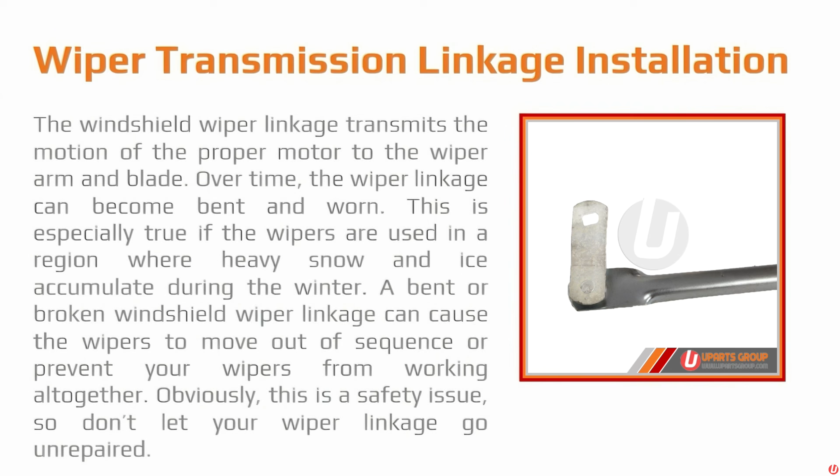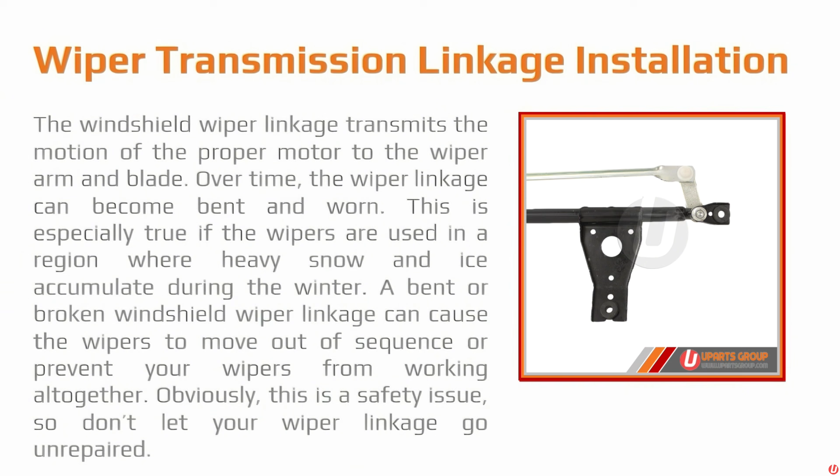The windshield wiper linkage transmits the motion of the wiper motor to the wiper arm and blade. Over time, the wiper linkage can become bent and worn. This is especially true if the wipers are used in a region where heavy snow and ice accumulate during the winter. A bent or broken windshield wiper linkage can cause the wipers to move out of sequence or prevent your wipers from working altogether. Obviously, this is a safety issue, so don't let your wiper linkage go unrepaired.

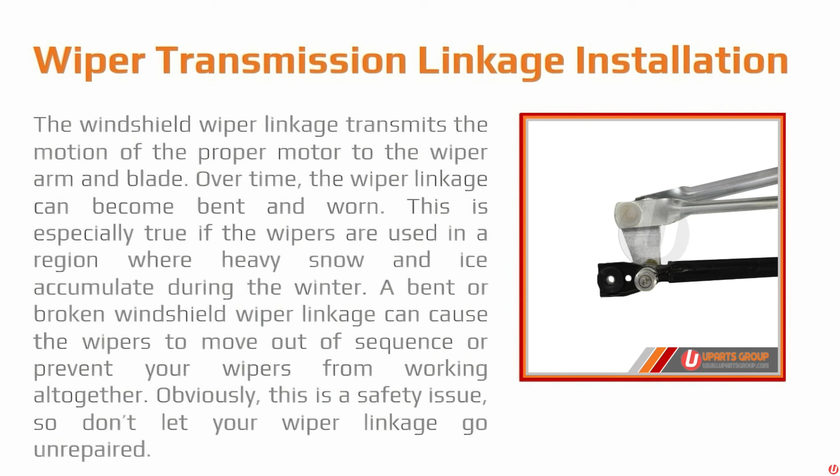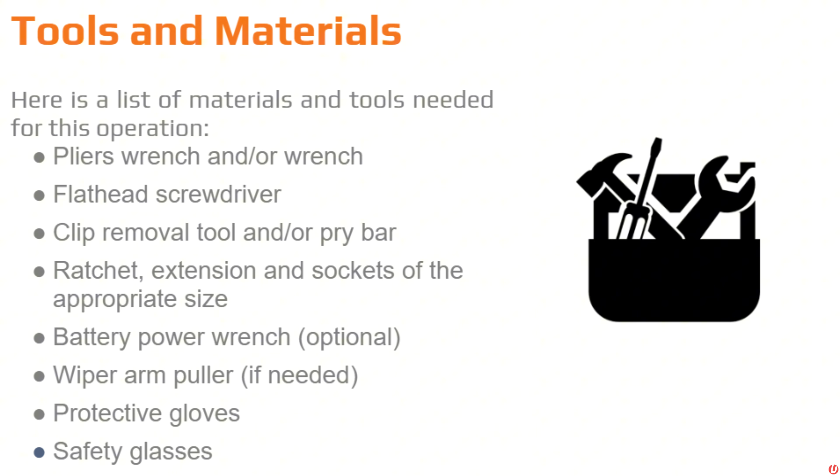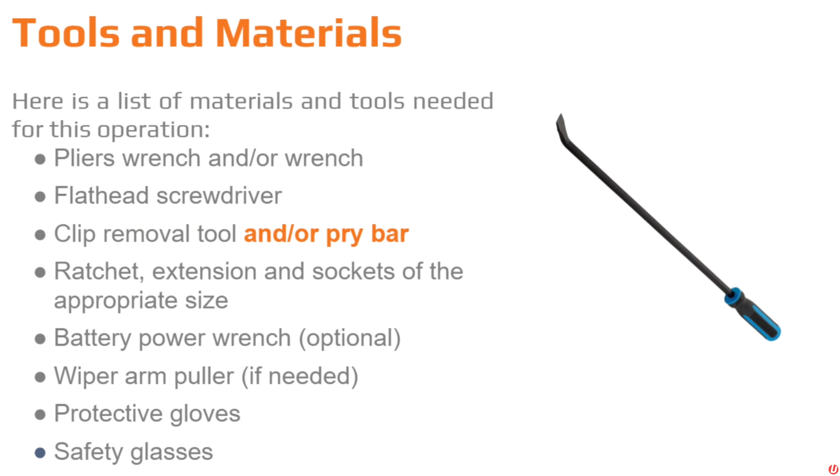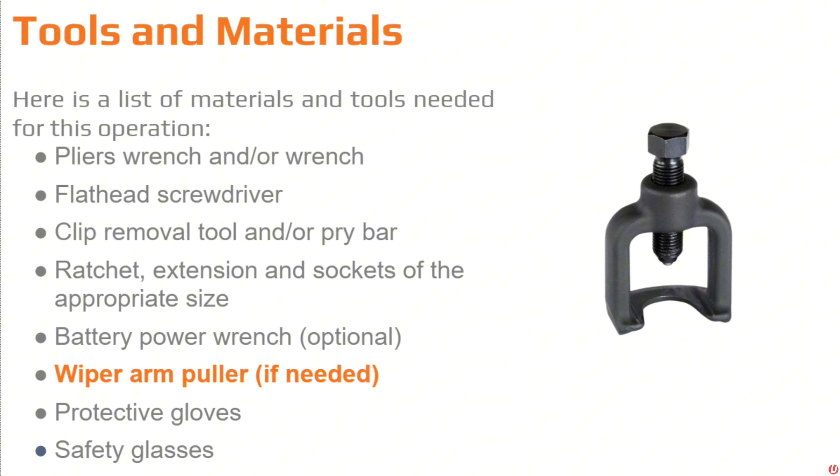This job has been considered an easy difficulty level of installation by our technicians. The suggested time for this job is about 30 minutes to 45 minutes as per our technicians. Here's a list of materials and tools needed for this operation. Pliers wrench and/or wrench. Flathead screwdriver. Clip removal tool, trim tool and/or pry bar, ratchet, extension and sockets of the appropriate size, battery power wrench, wiper arm puller if needed, protective gloves, safety glasses.

Today we are going to replace the windshield wiper linkage on a Mazda Tribute 2001 using U-Parts Group replacement part number WLTR01. Here is some additional information on the U-Parts Group part number. The U-Parts Group part number is WLTR01. This application will fit all Mazda Tribute from 2001 to 2006 and all Ford Escape from 2001 to 2007, as well as all Mercury Mariner from 2005 to 2007.

The Mazda OEM part number is ECY1-67-360, or EC01-67-360 A, B, C, or ZZC0-76-360, or ZZC0-76-601. The Hollander part number is 621-00511. The Canadian Tire part number is 021-2034. And the Dorman Products part number is 602-301.

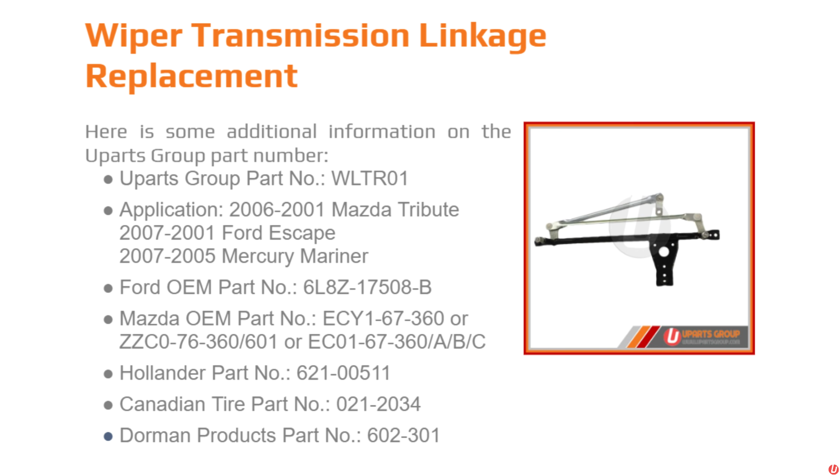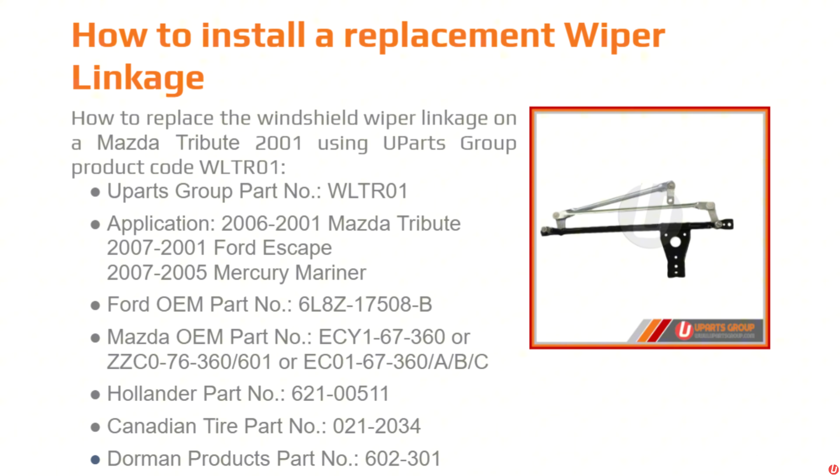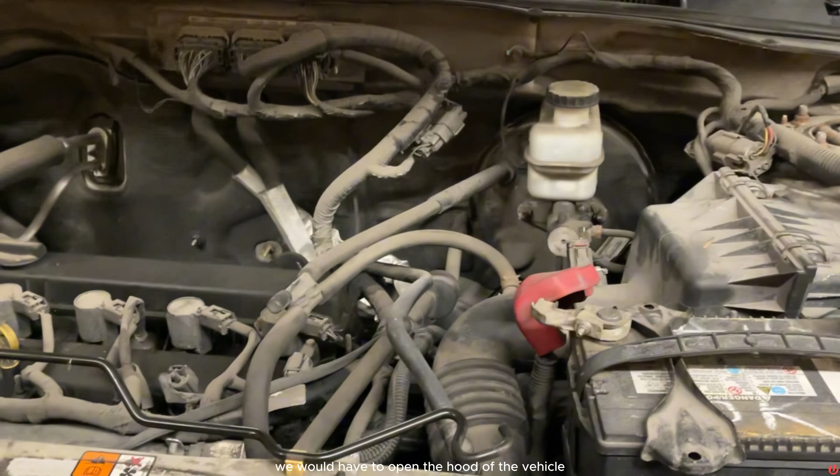How to change the wiper linkage on a Mazda Tribute 2001 using U-Parts Group replacement part number WLTR01. To replace the linkage, we would have to open the hood of the vehicle. Before we remove the wiper arms, it's recommended to mark the position of the two wiper arms, so we can reinstall them to the same position after replacing the wiper transmission linkage. We can use a yellow or white marker to mark the position of the two wiper blades.

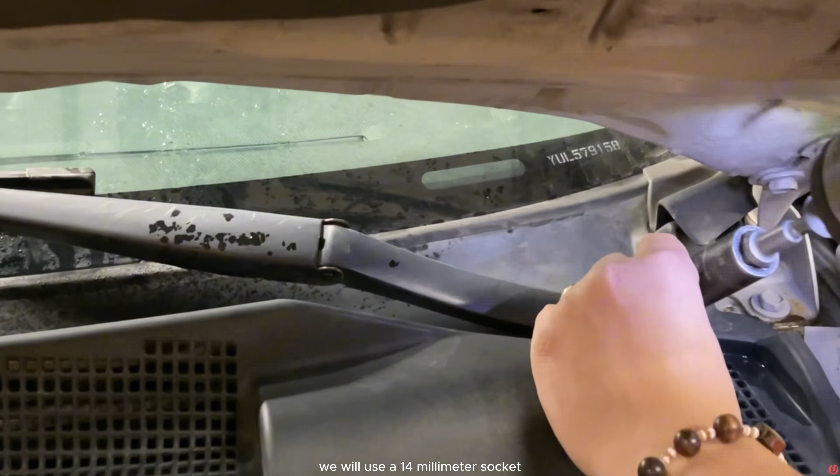To remove the wiper arm nut, we will use a 14mm socket. To remove the wiper arm, we can use a wiggling motion up and down. This motion will release the wiper arm from the shaft of the wiper linkage. If you are having trouble removing the wiper arms, you can use a wiper arm puller. After removing the two wiper arms, we will set them aside.

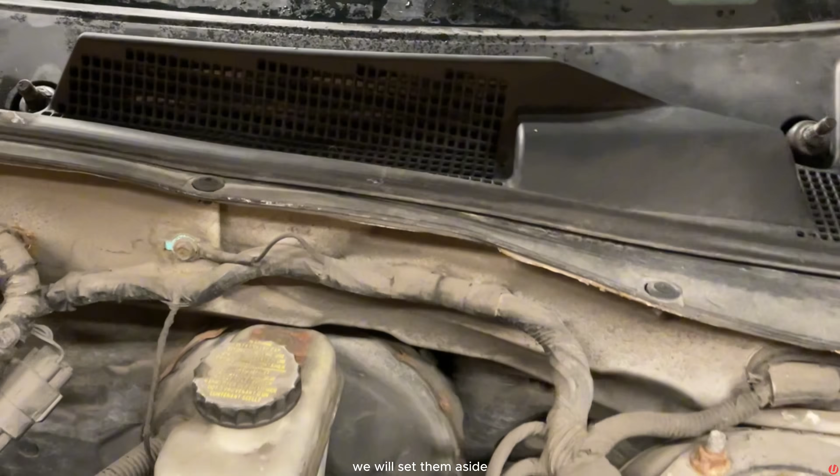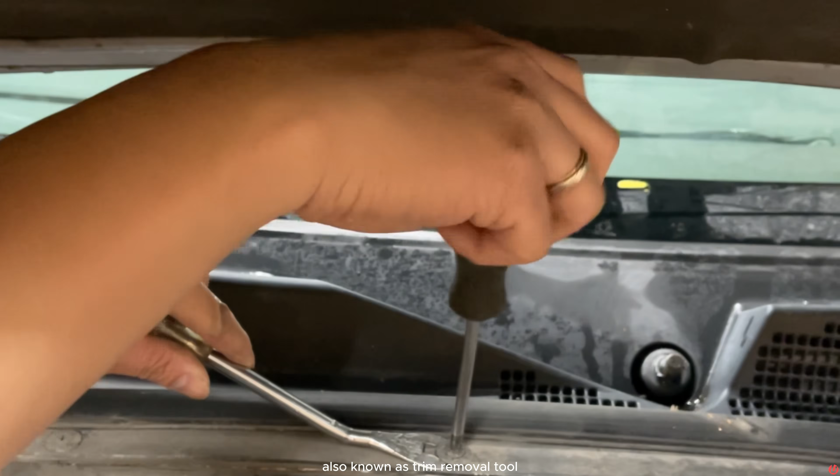Before removing the cowl panel, we will have to remove the 7 push pins that run along the cowl panel using a clip removal tool, also known as a trim removal tool. Also, we need to loosen the rubber fender trims on the driver's side and passenger side. These rubber trims sit on top of the cowl panel and run along the edge of the fender.

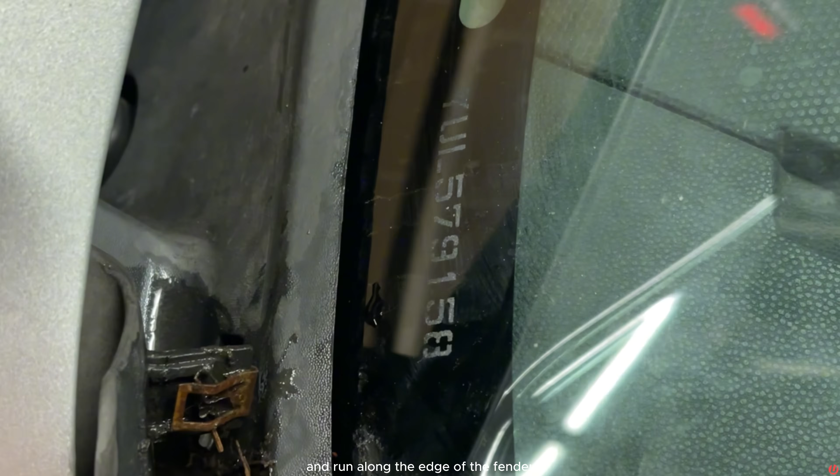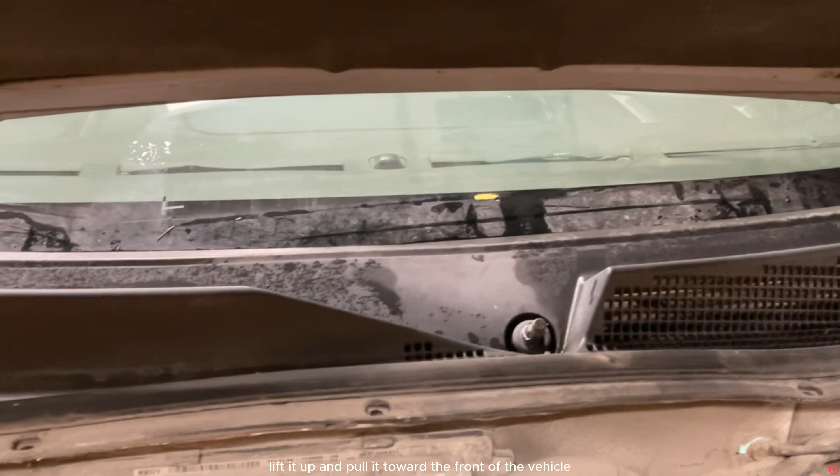To remove the cowl panel, we must grab the cowl panel, lift it up, and pull it toward the front of the vehicle. We have two options here. We can either remove the cowl panel completely from the vehicle, or we can simply sit the cowl panel on top of the engine and still have access to the wiper linkage and work with it.

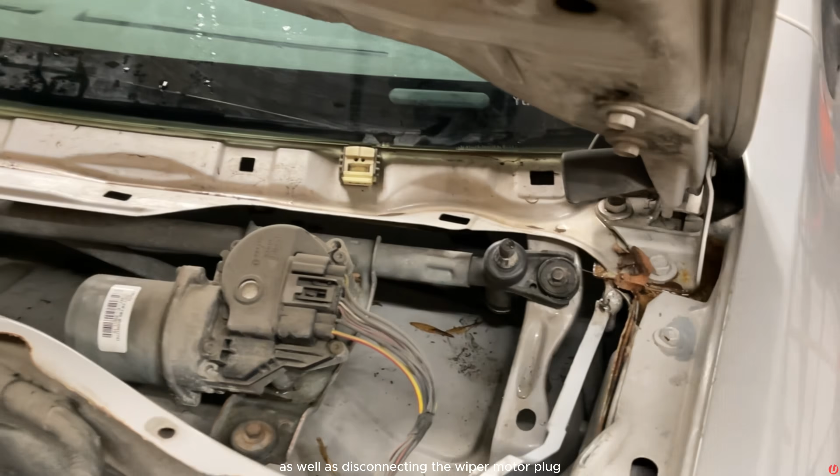Before removing the wiper linkage, we would have to remove the 8mm bolts that mount the wiper linkage to the cowl dash panel, as well as disconnect the wiper motor plug. First, disconnect the wiper motor plug. There is a little tab on the connector. We would have to press on that tab to unlock and remove the wiper motor plug.

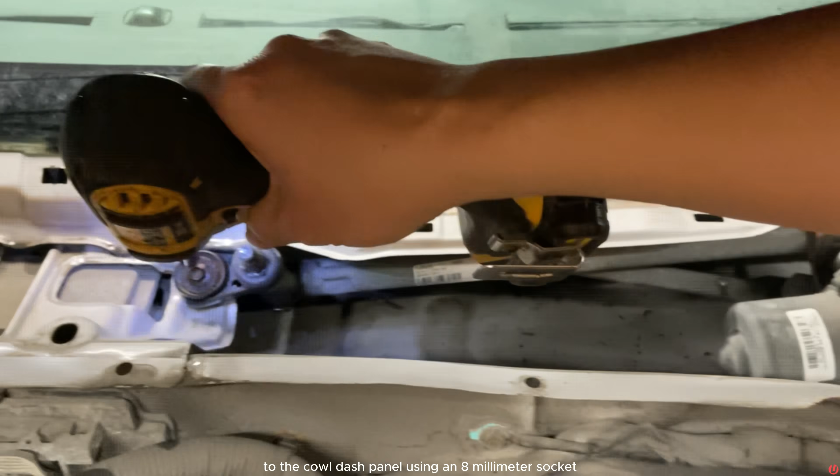Then, we will remove the bolts that retain the wiper linkage to the cowl dash panel using an 8mm socket. To remove the wiper linkage assembly from the cowl dash panel, lift it up and pull it toward the front of the vehicle.

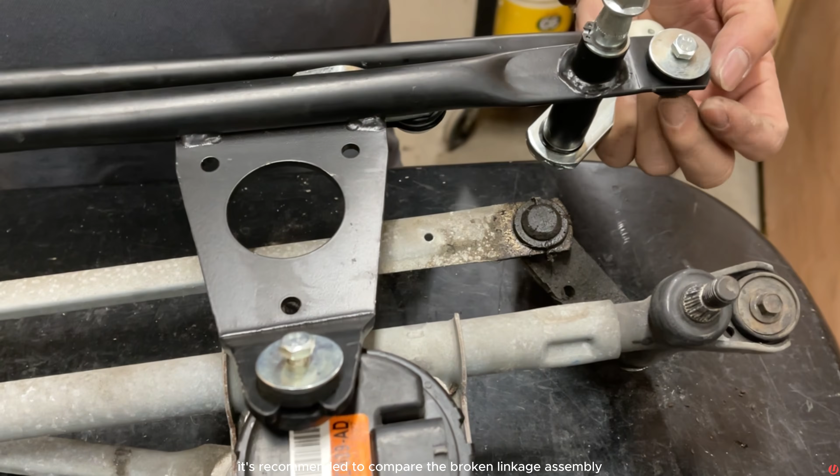After removing the wiper linkage assembly, we will put it on a workbench. Before working with the broken linkage, it's recommended to compare the broken linkage assembly with the new replacement linkage assembly.

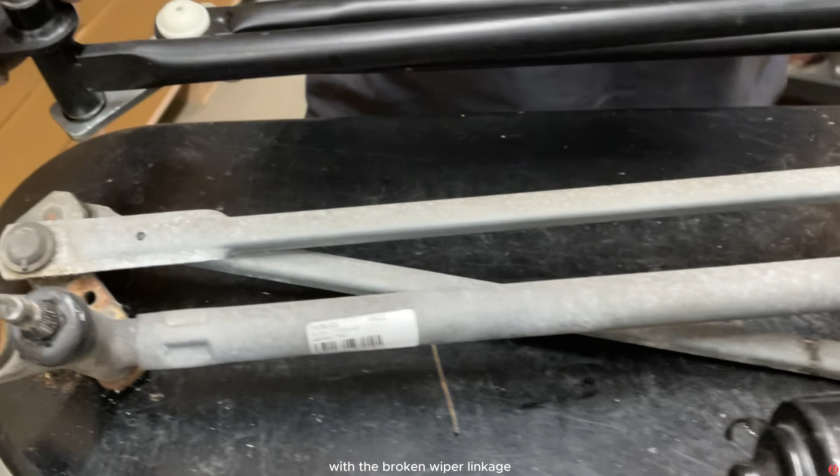We can compare the mounting points of the two wiper linkages, making sure that the two wiper linkages have similar mounting points. We can also measure the distance between the two shafts of the replacement wiper linkage with the broken wiper linkage. If the two distances are equivalent, then we are sure that we have the right replacement wiper linkage. We can then continue the operation.

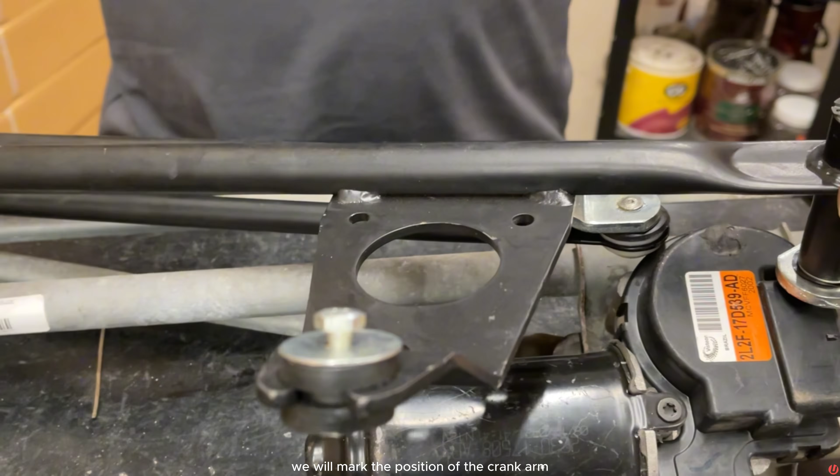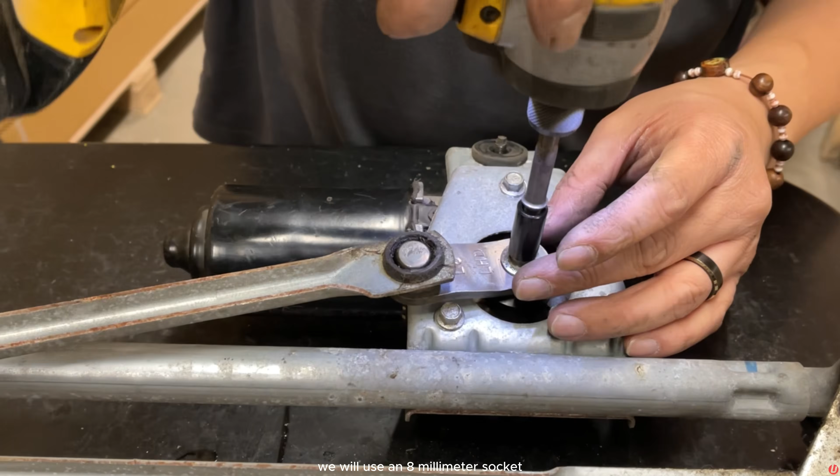Before removing the wiper motor from the broken wiper linkage, we will mark the position of the crank arm, or we can take a picture of the crank arm position. We will need this starting position when reinstalling the new replacement wiper linkage. We will use an 8mm socket to remove the nut that retains the crank arm to the wiper motor shaft.

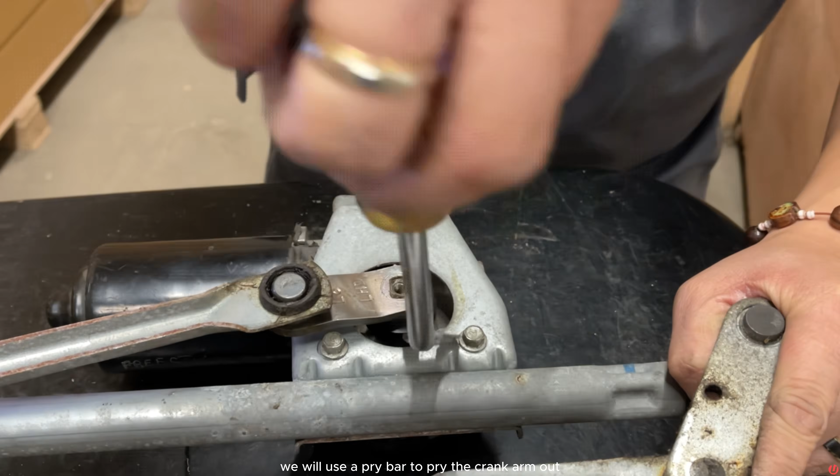And to remove the crank arm from the wiper motor shaft, we will use a pry bar to pry the crank arm out. Or we can gently tap on the side of the crank arm to release the crank arm from the wiper motor shaft.

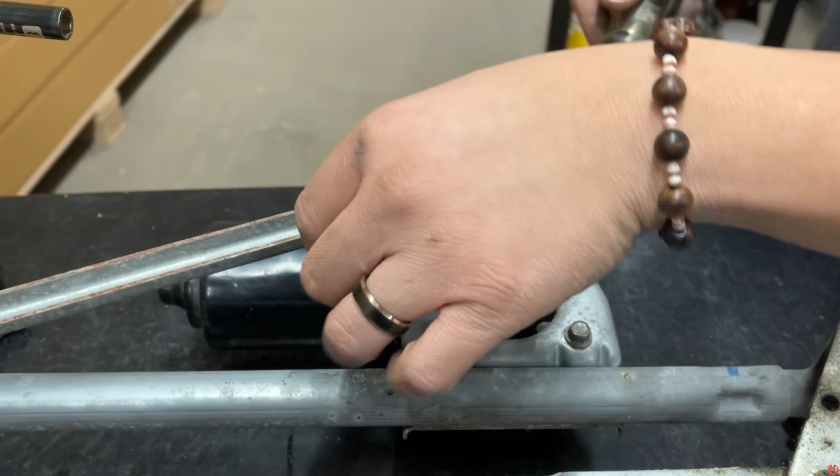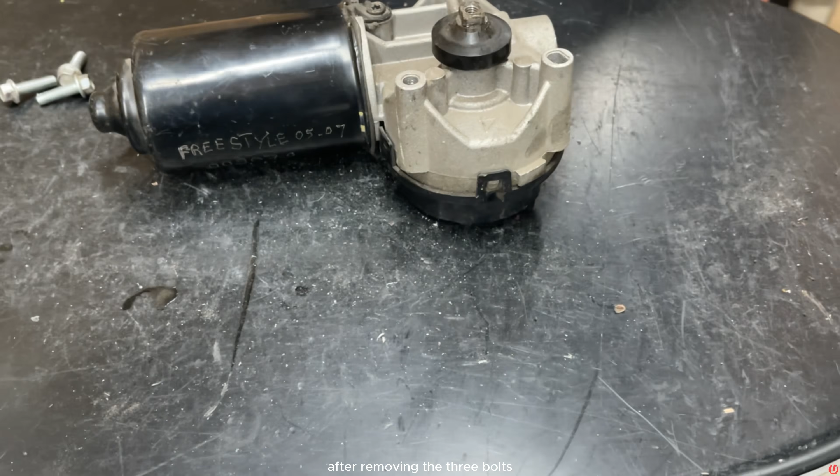Next, we will remove the 3 bolts that retain the wiper motor to the wiper linkage using an 8mm socket. After removing the 3 bolts, it will release the wiper motor from the wiper linkage. We will set the old broken wiper linkage aside and position the new replacement wiper linkage to the wiper motor.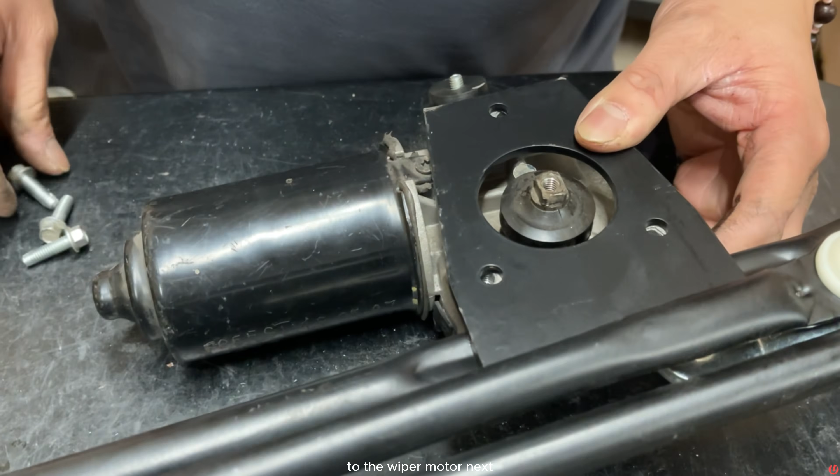Next, we will then position the 3 bolts that will retain the wiper motor to the wiper linkage. Then, we will secure the 3 bolts using an 8mm socket. Next, we will position the crank arm to the wiper motor shaft. Please note that we must position the crank arm to the same position as when we removed the old broken linkage.

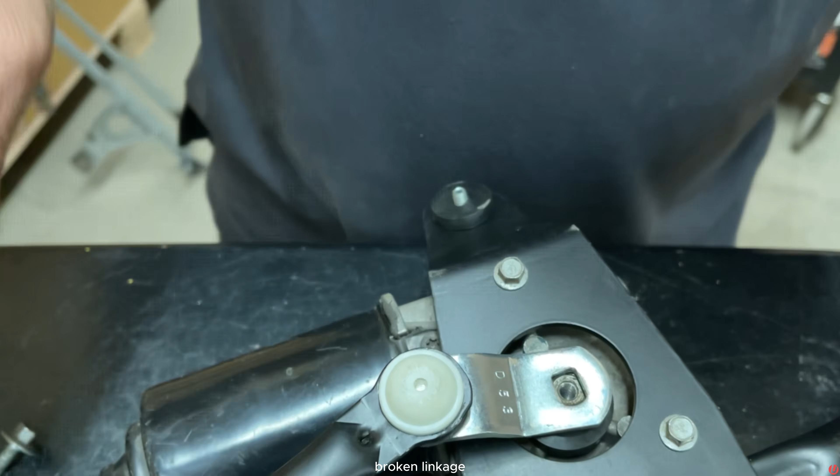Then, we will install the nut on the wiper motor shaft. We will then secure the nut with an 8mm socket while locking the crank arm in position.

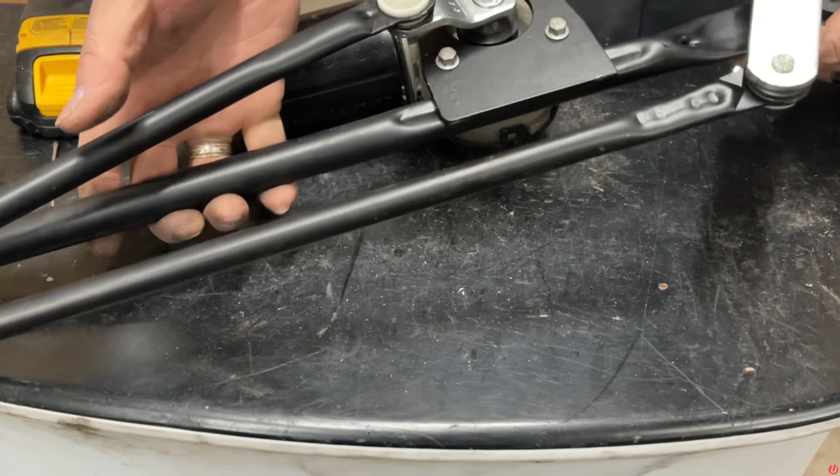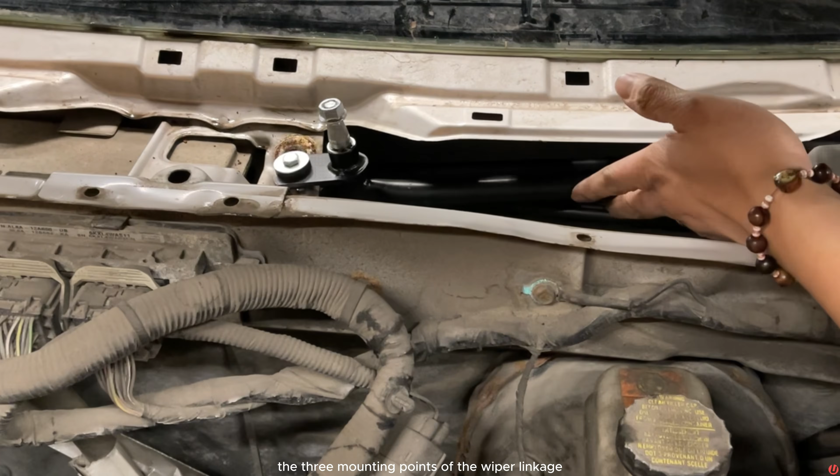After the installation of the replacement wiper linkage with the wiper motor, we will move the wiper linkage assembly back to the vehicle. We will align the 3 mounting points of the wiper linkage to the cowl dash panel, and we will install the 3 10mm bolts on the mounting points and secure them with a 10mm socket. Next, we will plug in the wiper motor connector.

Then, we will do a quick functional test before reinstalling the cowl panel and the 2 wiper arms. As we can see, everything is perfectly functional. This has shown that we successfully installed the replacement of the wiper transmission linkage. We can now stop the operation of the wiper linkage and go ahead with reinstalling the cowl panel and the 2 wiper arms.

To reinstall the cowl panel, we will move the cowl panel back to the windshield and make sure that all hooks under the cowl panel go under the windshield and the 2 wiper linkage shafts fit into the 2 holes on the cowl panel. We must make sure that the driver's side and passenger side fender trims are placed in position and properly aligned with the edge of the fender. Then, we will reinstall the 7 push pins to secure the cowl panel to the cowl dash panel.

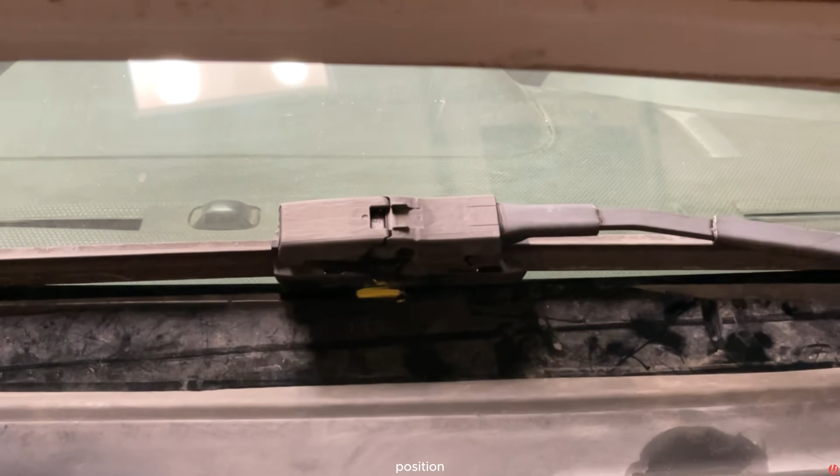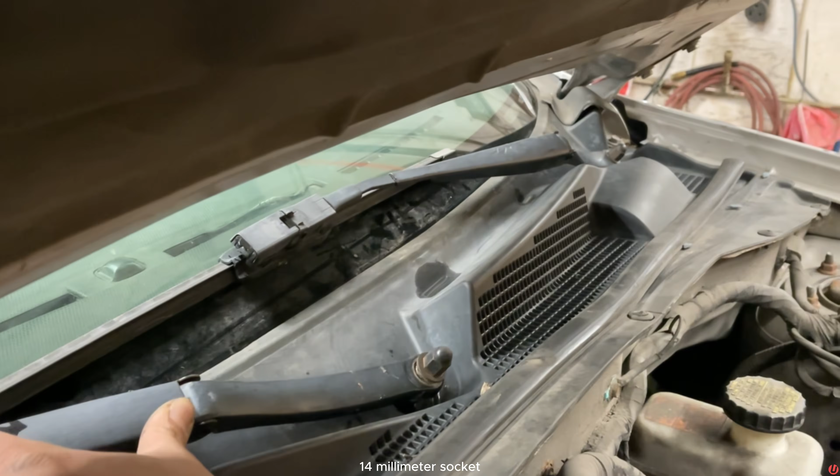Before reinstalling the 2 wiper arms, we will remove the 2 nuts on the wiper linkage shafts using a 14mm socket. Next, we will reinstall the 2 wiper arms. We need to position the wiper arms to the marked position, the same position as when we removed the 2 wiper arms at the beginning. Then, we will reinstall the 2 nuts that retain the 2 wiper arms in place. And we will secure the 2 nuts with a 14mm socket while locking the position of the wiper arms.

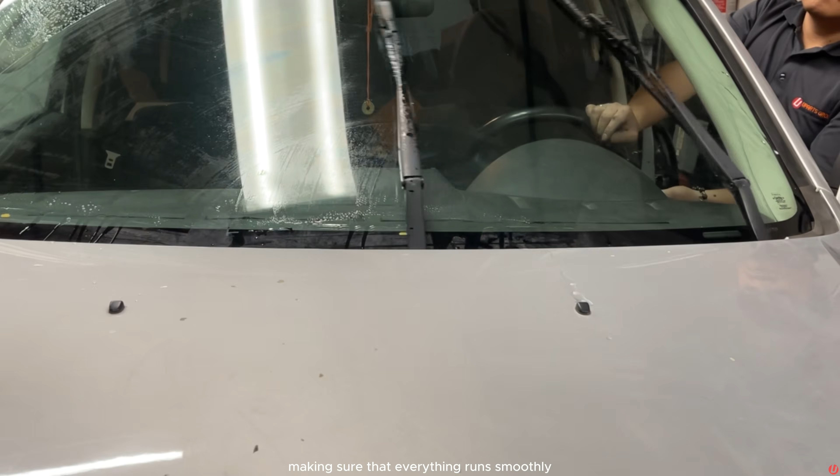Then we will close the hood and make a final functional test, making sure that everything runs smoothly before completing the installation of the replacement wiper linkage. As we can see, everything is performing perfectly and fully operational.

This has completed the installation of the replacement of the wiper linkage on the Mazda Tribute 2001 using U-Parts Group replacement part number WLTR01. This has completed our installation video.